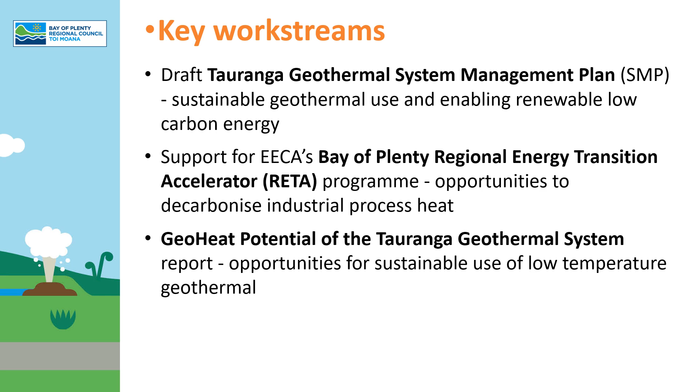Kia ora. This is a recording of a presentation on geothermal heat for residential, commercial and industrial use within the Tauranga geothermal system. My name is Celia Wells and I am from GeoExchange.

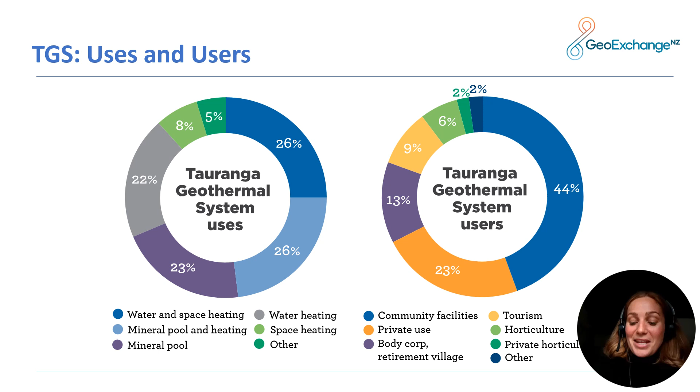So hopefully by the end of this presentation, you'll understand that yes, the resource is great for pools, but there are many other applications which can be used for the region's strategic advantage.

In New Zealand, we're really fortunate that approximately 18% of our electricity generation comes from geothermal. What's interesting about that is that when you mention geothermal to any New Zealander, their mind instantly goes to the role it plays in electricity generation. I'm going to talk about the term geoheat. So that's different than using geothermal for electricity generation. It's talking about using that geothermal heat directly.

So there's two definitions here of this international term, geoheat. There's direct use. That's systems that use the available heat, geoheat, directly. So it might be a geothermal hot pool. So I want to bathe comfortably in 40 degrees. I'm really fortunate that I can extract 50 degrees out of the ground and use it directly.

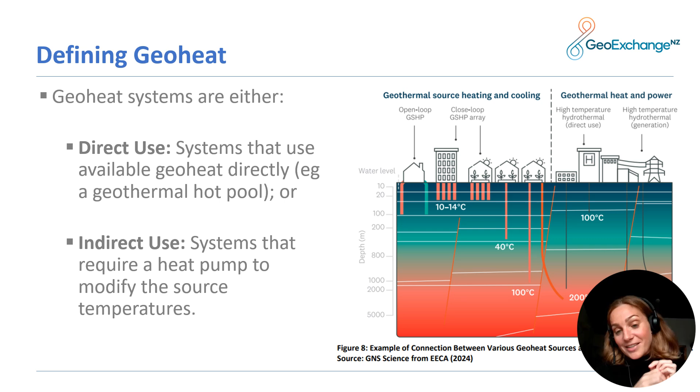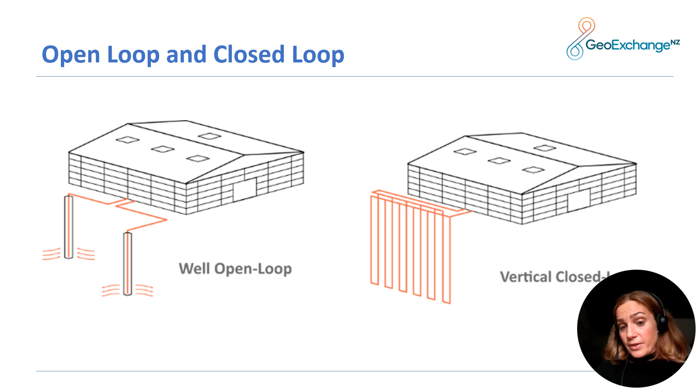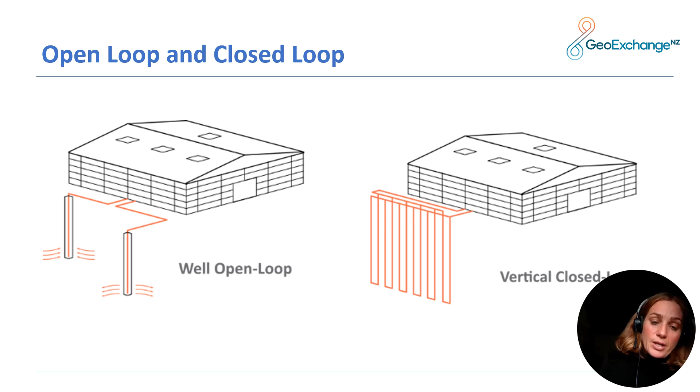There are installations where that return might just be soaking through the ground, but in this example here, there is another drill hole and the water is returning back into the aquifer. So that's an open process, taking the water and delivering the water back into the ground. The heat exchanger in this case, as this can be used for direct use or indirect use, sits within the building.

Whereas if you look at the closed loop system to the right there, this is a little bit different where the heat exchange system is sitting within the ground. Those are closed loops of piping sitting within the ground, and it's almost using the ground like a thermal battery. Within those pipes is a liquid, maybe a brine solution, that just circulates, and it circulates that warm water or hot water throughout the system.

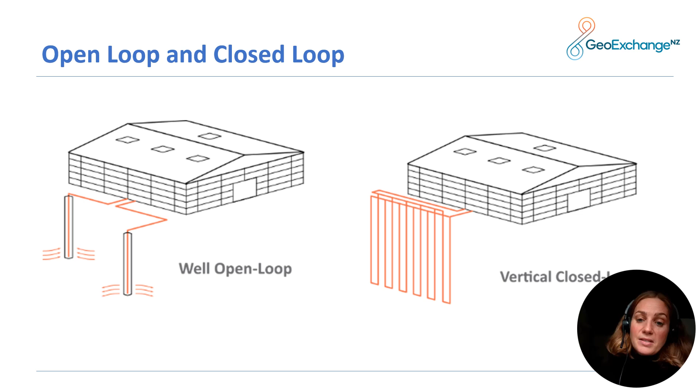There are pluses and minuses between these systems. The reason that you'll use one in a location and not another is determined by a lot of different factors. It could be your access to groundwater, activity happening with your neighbours, etc. So there can be pluses and minuses for both, but I'm not going to make a sweeping statement about that because it's always going to be determined by a professional on a case-by-case basis.

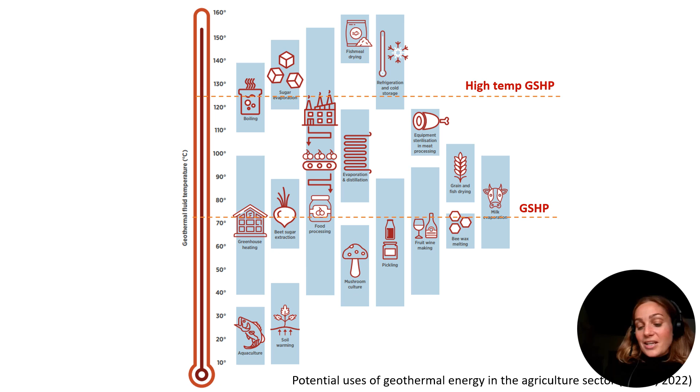So why consider geoheat? Well, unlike other renewables, a major benefit is that it's not weather dependent. It sustainably generates heat 24/7. I mentioned the work with the covered crop growers before. The fact that heat generates 24/7 is a major attraction for them because they really need that heating at nighttime. And then another point here is that unlike biofuels and hydrogen, geoheat does not need to be transported, stored on site. It's not subject to supply constraints and fluctuating costs. So there's a real appeal of energy security and localized energy security if you can pursue a geoheat installation.

It's compatible with electrification and can reduce the need to upgrade or invest in electrical infrastructure. I'm hoping that Yale in his slides will actually cover this as well. But when you are looking to electrify, you may consider going for an air source heat pump. But one of the considerations with that is that you're going to be hitting peak electrical load, and you need to be able to consider whether there is enough infrastructure capacity within your neighborhood or in the region. So when you consider a ground source heat pump, because it is much more efficient, often your peak loads are say half of what it might have been with an air source heat pump.

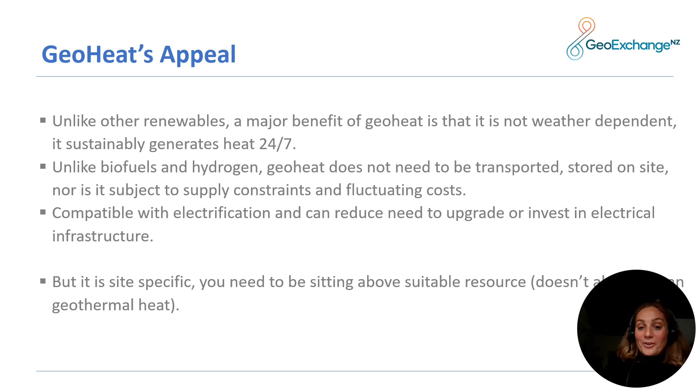So I've just sort of sold you geoheat, but I'll also add that it always has to be site specific. It's really hard to talk about generalizations when it comes to geoheat. You need to be sitting above a suitable resource. That doesn't mean you need to be sitting necessarily above hot temperatures. We're going to show you what you can do with ambient temperatures very successfully. But it does also mean that you need to be sitting above really good access to groundwater. And if you've got that combination of good groundwater and geothermal heat, that's a great win. And if you might want to take a guess, one of the regions that we think has the combination of both of those, of course, that is the Tauranga geothermal system.

Last slide for me before I hand over. So one of the interesting things about New Zealand is that we are world leaders in geothermal electricity generation, but we have a very small amount of geoheat installations. And geoheat installations, direct or indirect use, as a global trend, is just really accelerating. And this is the point of this slide here. So to get an indication of where massive amounts of investment are going in, I'm going to direct you to the teal blue that is Iceland. So Iceland, like New Zealand, has surface features, even more geothermal electricity generation. So geothermal heating projects is not unexpected there, but you can see that it's a flat line of investment.

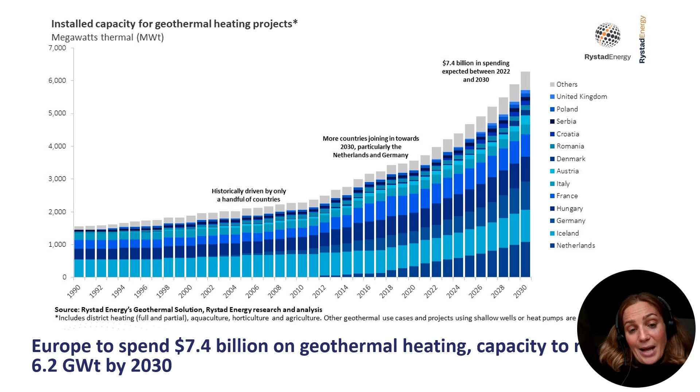What's really interesting is below Iceland in the darker blue from 2012 you see the Netherlands, and that's a massive escalation in investment in geothermal heat. We're going to show you examples of glass houses where they are choosing to drill 2.5 kilometres to access temperatures which are available at a few hundred metres in Tauranga. So huge investment trend in Europe. The other main country other than the Netherlands to point out is Germany. But just collectively, as everybody transitions away from gas and coal and district heating schemes, it's forecast to be 7.4 billion spent on geothermal heating by 2030.

So yeah, my name's Yael Carton. I'm the director here at GeoExchange New Zealand, and I'm going to start going through actually the mapping and the work that we did for this project.

So the first map we've got here is we've looked at 150 metres below sea level. The reason we picked this is that's where the majority of the boreholes are at depth in terms of the numbers. It's also a really typical and relatively economical depth for drilling to. So probably the main things we see here is when we look at that temperature at that depth, we can see the red dots there down to the south, up near the mount, and then there's some there through the CBD area, which the scale doesn't quite allow perfectly.

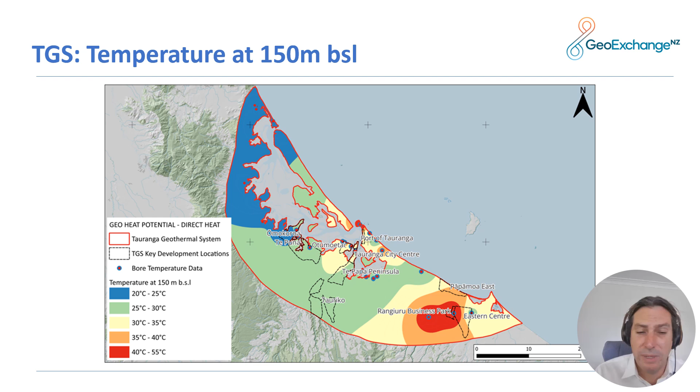But you can see that at a depth of 150 metres, we're already getting temperatures over 40 degrees. And then up to the north is obviously the opposite in a way, in that we're only around the 20 to 25 degrees. However, when we think of that from a geoheat perspective, that's still a geothermally influenced section. We'd otherwise expect it to be around the 15 to 18 degrees if there wasn't a geothermal influence in those areas.

So on this next slide, what we've tried to do is now we're showing actually where 30 degrees occurs at what depth across the site. As you would expect, again, down to the south, down around the mount, coming back through the CBD area, we've got our shallower depths, and it's between 15 and 75 metres, those orange marks that you see. So we are seeing that 30 degrees occurring relatively quickly.

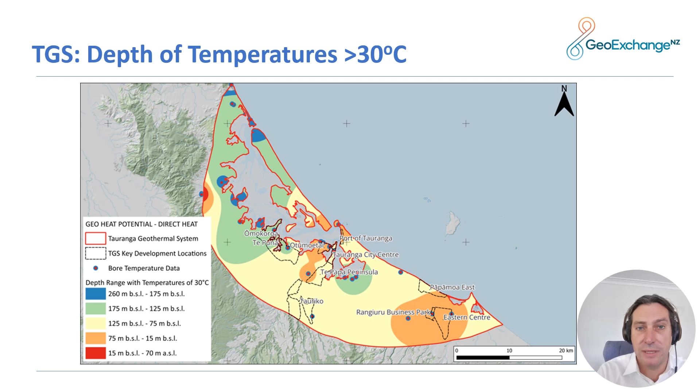The one odd anomaly, which you probably notice up to the northwest, out to the west there, is actually above sea level. You see the red mark there. We're actually above sea level. Obviously, we're up in the hills in that area, and having 30 degrees, which again, that's the RMA value of where officially we're geothermal.

Now we want to have a look at where does 50 degrees occur? At what sort of depth do we find it? Now, probably the main interesting thing from here, from a resource management perspective, and one of the real summaries and conclusions of our work, is that we can't extrapolate data here as such. So when we're talking about where we're hitting 50 degrees, there's not a lot of data. So we've just got dot points from individual bores. It's not like a mapping exercise, if you like.

So what you will see, and probably not a surprise, the only red dot we have here is at the mount, which is the Mount Hot Pools. And that's less than 150 metres deep. And then the orange dots are where, within 250 metres, we start to hit that 50 degrees. And again, you can see it down to the south and around that CBD area again.

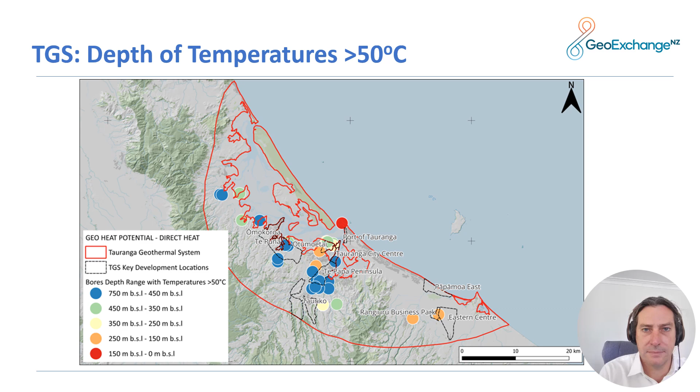For those who prefer, or who aren't as good with maps, do you prefer tables to look at the data? We've basically got the same sort of data here. And what we've done is we've aligned this with those future development zones from the Smart Growth Strategy. So you can see the port there, where we've got 30 degrees at around 125 metres deep, 50 degrees closer to 500 metres deep. As you go further down, Eastern Centre and Rangiuru, you can see we're getting 30 degrees around the 75 metres, 50 degrees within 200 metres deep.

Now, one of the really interesting things when we did this overlay of these development zones with the geothermal areas is that we've actually got some of the higher temperatures in and around areas like the port and the business parks, where you want the higher temperature for processing. So it's really quite convenient. Whether or not it was planned, I guess we'll never quite know.

The other thing is where we have the cooler temperatures, it doesn't mean that we can't use geoheat as a system. Remember, we've got the ability to use heat pumps, we've got the ability to use ambient groundwater. So some of those other areas where we've got the cooler water actually make it really good also for both heating and cooling systems.

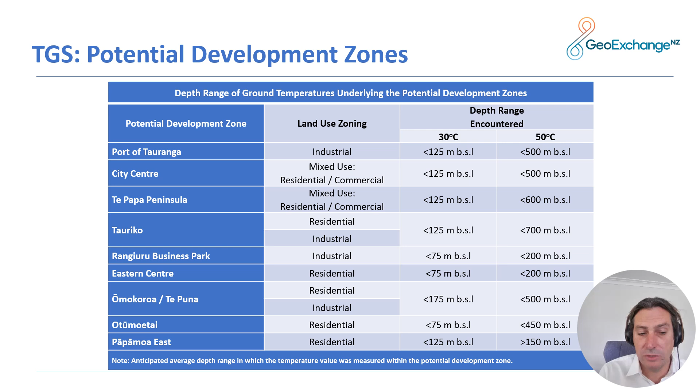Maps and sort of where the temperatures are in around the Tauranga geothermal system. So we'll go through a couple of case studies of direct use and indirect use systems. So the direct use system we're showing here is from the Netherlands, which people are possibly familiar with. They're doing a lot of work both with greenhouses, but also with the transition away from fossil fuel heating systems.

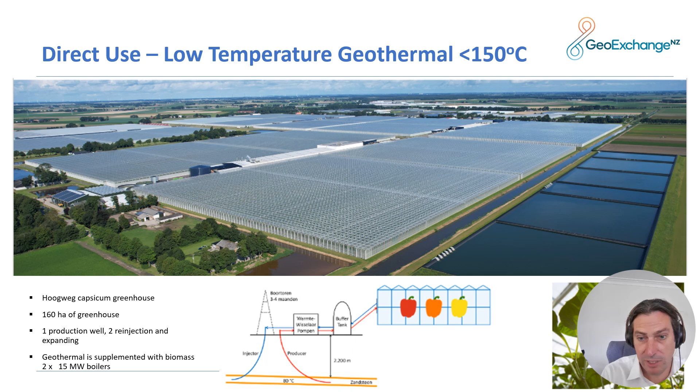The greenhouse you see there is like 160 hectares, which compared to the typical large system in New Zealand is around 10 hectares. But they're drilling down to sort of 2 kilometres deep to get the 70, 80 degrees that we get here in New Zealand within hundreds of metres in many applications.

Another example here of, again, a large system is a repurposing, if you like, or pulling out the fossil fuels for a district heating scheme in Munich, where they're targeting 100% of their district heating from renewable energies, and geothermal is going to be a big part of that. So they're putting in a whole series of 6 deep wells, and they're looking at 2.5 kilometres deep to get a 60-degree reservoir, and then 5 kilometres deep 5 kilometres to the south, we're looking at 150 degrees.

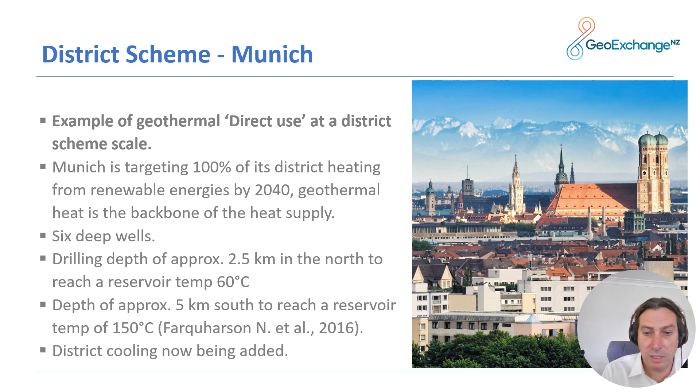So we're talking about, again, much deeper depths for getting the sort of temperatures that in Tauranga we get very, very shallow. And probably just of interest here as well is that they're also now looking at adding district cooling to the system. With obviously a changing climate, they're starting to get more and more people looking for cooling as part of the system as well. To access that, they'll look at the shallower temperatures. Two really quick case studies there of direct use systems.

One of the main findings from the work that we did with the Bay of Plenty and the TGS was that when you utilize the heat pump or indirect use systems, you get a lot more flexibility in your applications. There's a lot more things you can do with it. So that really neatly leads us into our indirect case studies.

So the first one I'm going to show is actually one of our projects from Australia in Canberra. It's the Australian War Memorial. It's just been commissioned in the last couple of weeks, late October or so, 2024. It's using that 18-degree ground temperature that they have in Canberra to provide heating and cooling. And it's approximately 4 megawatts of ground loop capacity.

And they're doing that through a closed loop system where we've got 216 vertical bores at 150 metres deep. They're all connected into a central energy plant, and that's feeding multiple buildings around the site. They're looking at energy savings of about $1 million a year and 1,400 tonnes of CO2 equivalent. So some really significant savings there.

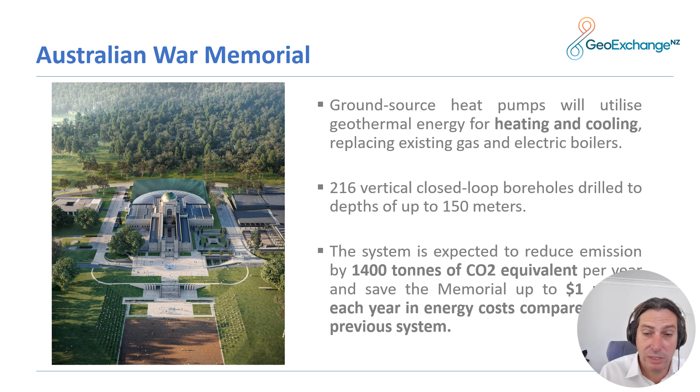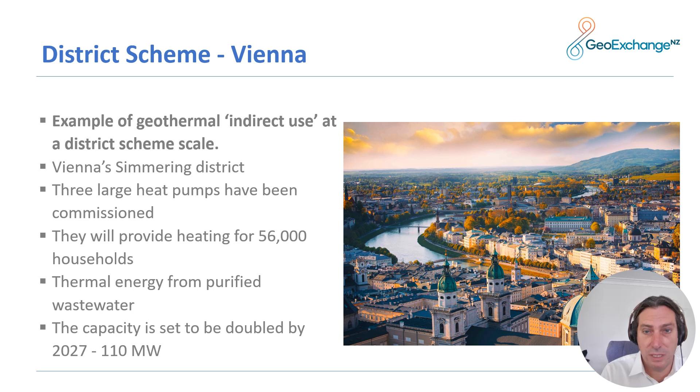Sharing this one here with Vienna for a district scheme that they're using. The reason for this is that they've got 3 large heat pumps there, and it, in a way, shows not everything is about geothermal as such in terms of using the ground. Here, they're actually, for 56,000 households, looking to use purified wastewater. So you probably hear the terms sewer heat recovery or effluent reuse. It's basically using the heat that's within that system to provide the heating to the entire area. And you see some big numbers there, up to over 100 megawatts in the next few years.

A really interesting one that we found from Slovenia for a greenhouse for tomatoes. So what they've done here is they had a groundwater source of about 30 to 40 degrees at like 1,500 metres deep. So again, comparing to say the Tauranga system, much deeper, not quite as hot. They need to deliver 65 to 85 degrees to the greenhouse at different times of year. Originally, they would use that source at 30 to 40 and boost it with gas to get up to the 65 to 85. They've pulled that gas heater out now and installed a heat pump to do that.

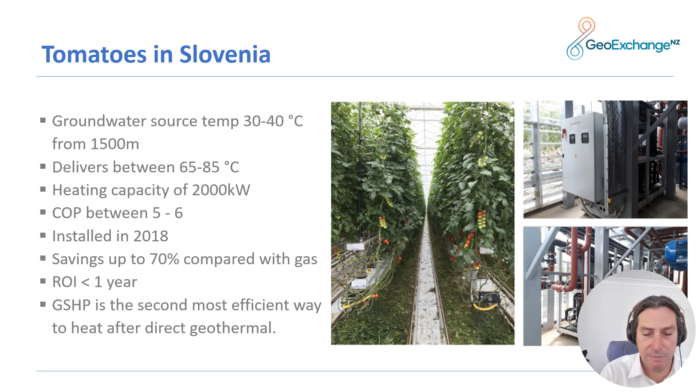They're now getting efficiencies of 500 to 600%, a COP of 5 and 6, and energy savings of 70% compared with the gas, for that extra boost from 30 up to 65 plus. And the payback for them was less than 1 year because it's obviously so efficient. And as a caveat to that, they didn't have to install the bore or anything else, because all that infrastructure was already in place. It was purely about pulling out the gas heater and putting in the heat pump.

Showing this as a bit of a summary table here. This came out of the RETA work with EECA. What it was is just to show the efficiency differences and the savings differences, probably the important one for most, on what happens when you get these higher temperature waters. So if you're running a greenhouse system and you're looking at an air source heat pump, you're going to have to design it, in a lot of parts of New Zealand, to operate down around the 0 degree mark.

And this is a nice data point too for some of the systems. So we've allowed here that you're going to get an efficiency of about 2, or 200%. When you get groundwater from ambient at 15 degrees, which is the one with the X there, then we can start to see that our COP is now at 2.7 or 2.8, with obviously the energy savings from that.

And then when we end up with groundwater around the 30 degree mark, so now we're just at the minimum, if you like, of that RMA definition of geothermal, we've basically doubled our COP and our efficiency from before, which of course means that we've halved our energy costs. And of course, as you get higher into more direct use, those savings can become even greater.

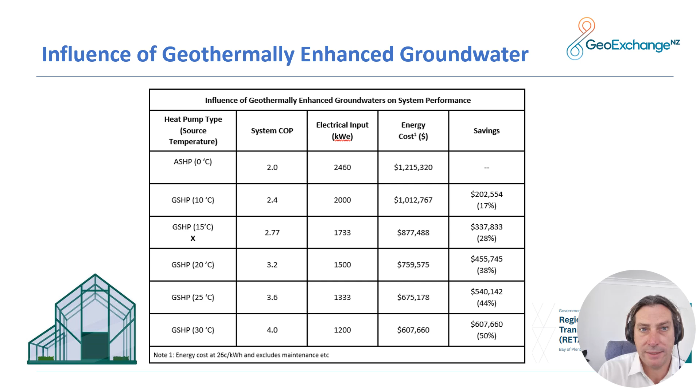When we talk about heat pumps, there's always a lot of questions about what sort of temperatures we can get to. Most of your standard heat pumps are around the 60 degree mark, thereabouts. That's a function of the refrigerant that they use. Some of the newer heat pumps using CO2 and other things can get up around 80 to 90 degrees. One of the really interesting things in the space at the moment is what EECA are calling very high temperature heat pumps, basically industrial size heat pumps that can produce steam, looking at temperatures up to 160 degrees.

That's with current technology, according to the European Heat Pump Association, and we have been seeing prototypes around 180 and even 200 in the next couple of years. So this really starts to open up the benefits of industrial heat from heat pumps, and when you can start that heating process with a geothermally enhanced aquifer, you've got even greater benefits than if that was an ambient groundwater situation.

And just to show that it's not just us stating this, EECA have just released a technology demonstration fund for these very high temperature heat pumps. It's out at the moment, but it'll be closed in the next few weeks, by early December 24. So that is available, demonstrating that EECA and the government are also seeing this as a technology they want to see in action.

Examples now of high temp heat pumps in action, or very high temp heat pumps in action, I guess. A lot of them will use things like waste heat, so it's not all about geothermal with these. The important thing is the technology application to show that it works. The source itself arguably doesn't matter so much. Obviously having geothermal there is a real bonus.

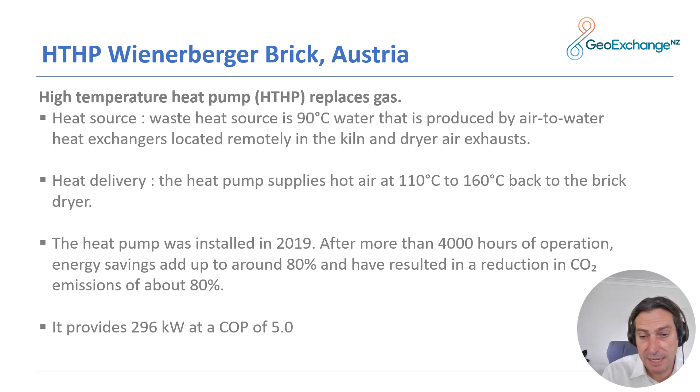So this is looking at using 90 degree waste heat from their process. They're able to provide over 110 degrees to their drying system, with around 80% reductions in CO2 emissions. So some obviously very significant savings there. And a big part of that is the COP, that energy efficiency of 500%.

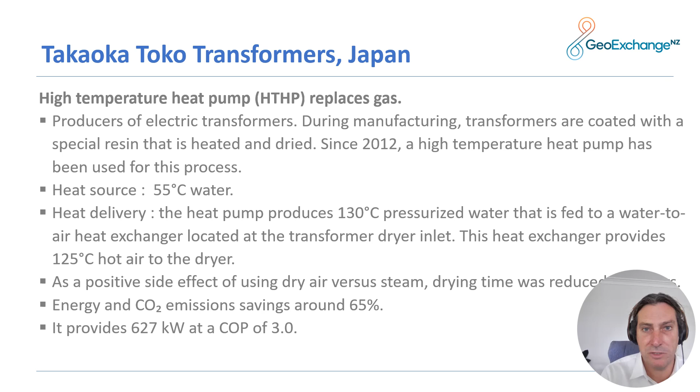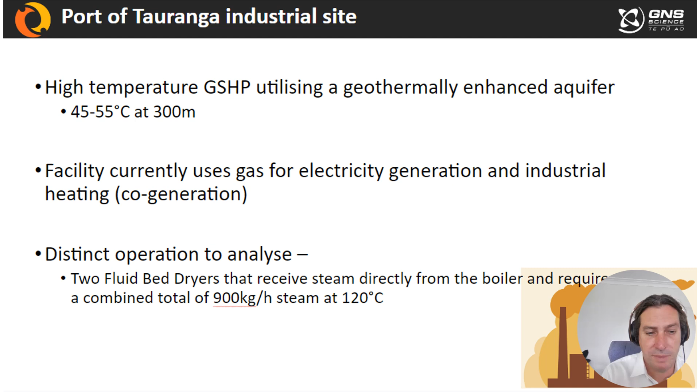A local example here from the work we did for the RETA. Here's what we looked at: a high temperature heat pump providing 120 degree steam, using 45 to 55 degree geothermally enhanced waters from a depth of 300 meters. What we demonstrated by doing this, we could eliminate 1,500 tonnes of carbon emissions annually from that system, and the OPEX was actually similar to the existing gas costs.

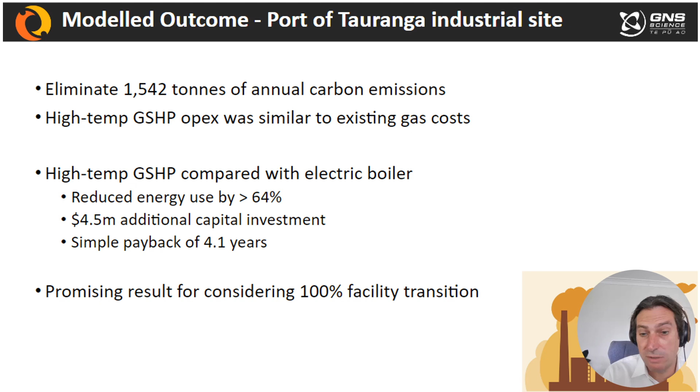Now, compared to electric boiler, which would be the standard replacement in this sort of thing, we've got an energy usage reduction of 64%. Now, that's not just annually, but it also means from the peak period, because often these systems are operating at 100% capacity or near full capacity, with 24/7 operation. So while there was an initial investment of $4.5 million, looking at paybacks, better than 5 years on this.

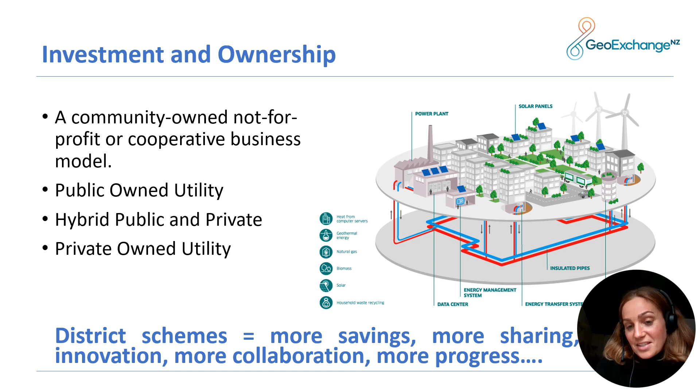You've just seen a number of really inspiring case studies. And you would have heard Yale mention quite often the term of a district energy scheme or district facility. And maybe sitting there thinking, well, what does this mean? Who invests in this, and who owns this? Essentially, there are very many different models around ownership, but I'll cover a few here.

One example, it could be a community-owned not-for-profit or a cooperative business model. This model guarantees outcomes for the benefactors of the system. An example or application I can see this really suiting is Papakāinga developments within New Zealand. We saw the example of the district schemes within Munich. A lot of those have public ownership. They're public-owned utilities servicing the city. So public ownership is another example.

The benefit, from my perspective, around public ownership is that often a public-owned utility is the first opportunity to have a technology demonstration. Of course, it could be a PPP, so some type of hybrid of a public and private model. Or in the end, it could be a private-owned utility. So that might be a thermal utility or heat utility provider. So an organization which comes in and installs the infrastructure and gives those connecting a heat contract for 10, 20, 30 years. The systems may last or exist for upwards of nearly 100 years. So that's one example, but it could just be privately owned.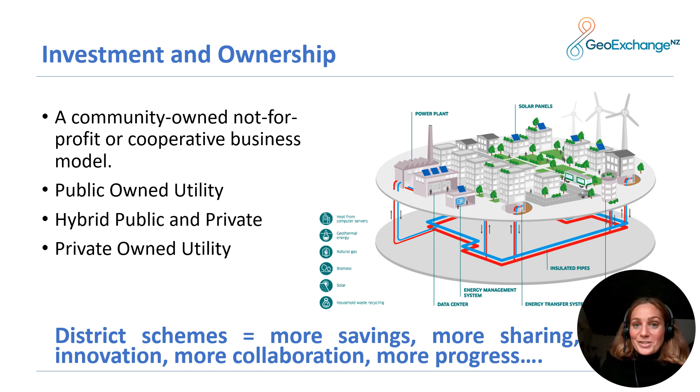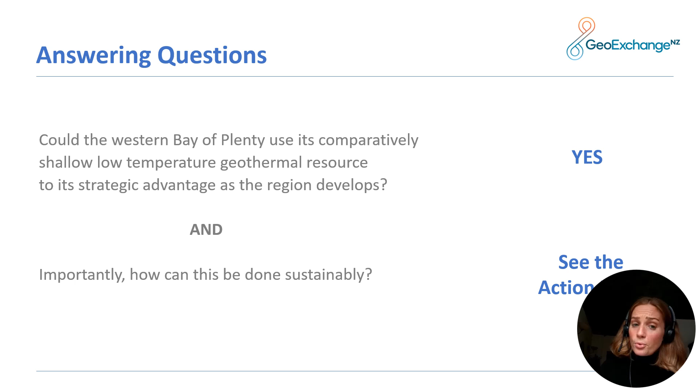So answering those questions that we posed at the beginning. So could the Western Bay of Plenty use this comparatively shallow, low temperature geothermal resource to its strategic advantage as the region develops? That's a capital yes there. So a resounding yes. We really think that it is an underutilized resource at the moment and has great potential for the region as it has to go on its decarbonisation journey and its energy transition journey to electrification as well. These are all really harmonious ideas that we're talking about here while promoting the role of geoheat in the region. And importantly, how can this be done sustainably?

So we're going to direct to some action items here. Of course, when it comes to resource consenting, the Bay of Plenty Regional Council have got their system management plan out at the moment, and there were recommendations within our report as to what we see as the best approach to resource management with geoheat installations. But a really key item is that this isn't the end. We don't present this opportunity and everybody walk away and necessarily do their own thing.

We need to continue to have the region strategically sit together and come up with a geoheat strategy for the region, because it is such an opportunity to support decarbonisation, to ensure regional energy security, and to contribute to that economic growth. But if we do that in a way which is extractive and not protecting the resource, we're no better off than we are at the moment. So that regional strategy needs to be strategic about how we approach this opportunity.

We need to continue to investigate the feasibility of geoheat applications, just like the examples and case studies that we've just shown you. We need to understand the applicability for industry within the region. Carry on doing pools, especially community facility pools, but don't just heat the pool, heat the facilities that are there. And if you've got a gym and a daycare centre nearby, make sure that you're using that heat, not just for the pool, but for those facilities as well. Great opportunity with commercial and residential buildings. A lot of development is happening within the region, which would be applicable in this case.